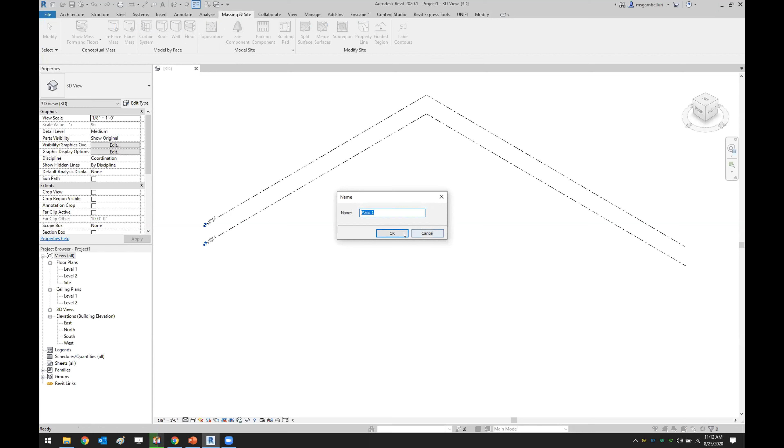There we go. Okay, can you see my Revit now? Look, all right, good. Yeah, I was going to have to explain it in words. Go to Revit, do an in-place mass, that's one way to do it. Okay, and then now I got to go up. Now I got to start all over again. Make a rectangle, I suppose it has a rectangular base. We could have an academic discussion about that in the future. Just click on it and say create form, pull this up, pull it over, and you got a rhombus. Okay, there we go, good enough? All right, easy peasy.

Okay, so let's start the formal presentation from the current slide. There we go, you can see it, right? Getting started with Revit. I figure this should be a little informal because I'm talking to a user group. I've talked on this topic probably 10 times this year already. So I'd like to figure out which way we should head on this topic because it's pretty broad. But anyway, we'll just play it out.

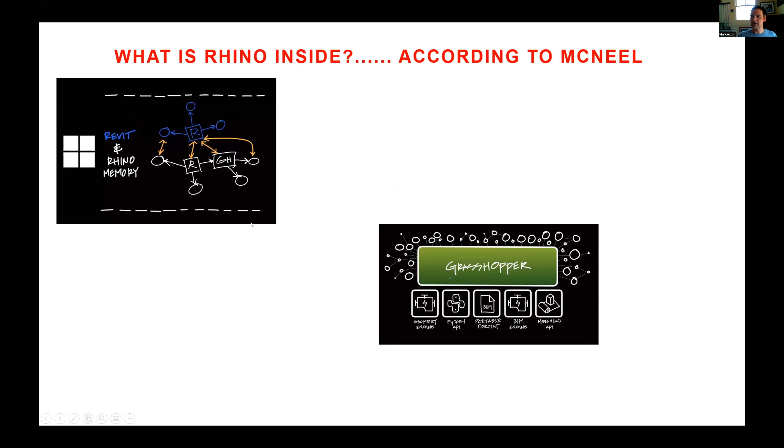They talk more about how it works in the background. Today, I'm going to talk more about the practical side of it. Okay, let's go through these really quick.

What's the issue? Please chime in if you've felt these pain points. What's the issue? We've got Rhino, right?

So typically in a design office, a lot of the design is done in Rhino, which is a 3D modeling program, or maybe SketchUp. Does anyone want to chime in and tell me if they've used Rhino in their office? Maybe some yeses, some nos, I can't see the chat, maybe some nothing.

We have a little interaction. You can do it while it's virtual. I believe that. Let me see here. Oh, there we go. Okay, I was able to, yes, okay.

Caesar says way in the past, back in the day, they used it a bit. Okay, good enough, at least you know what it is, at least you've heard of it. Familiar with Rhino, not working knowledge. You're gonna have to dissect that a bit more for me, Lee. Don't really know what you mean there, but okay. So if you're familiar with it, familiar from school, good.

Okay, so typically take a snapshot in the industry. Rhino, a 3D modeling program, is used for a lot of the design, not Revit. It doesn't have to be Rhino, sometimes it's SketchUp, I guess in some cases it might be FormIt.

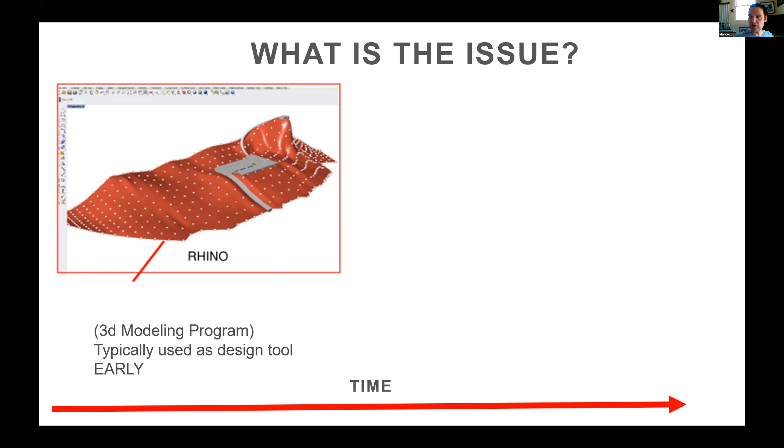So this is kind of like what typically happens in an office. Well, the problem is, so what's the problem? The problem is that you have Revit, right, which is a BIM software, a modeling tool, a documentation tool, and a 3D coordination tool. But if all the designs are happening early on in Rhino, not in Revit, well you've got to get them over there, right? So that's the problem we have.

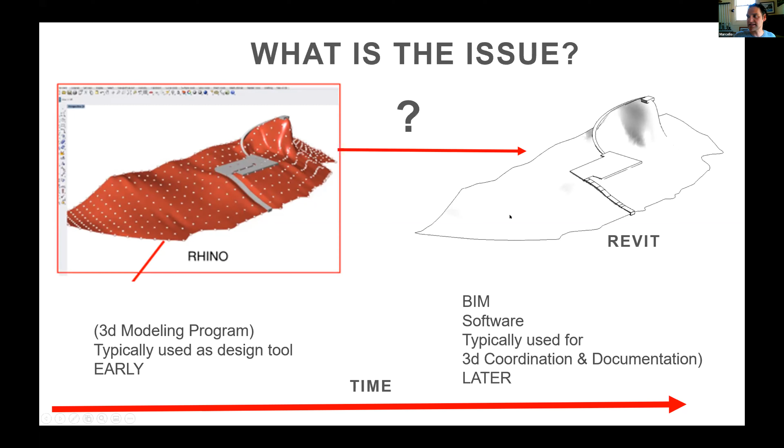And so it's a big problem in our industry. Would anyone agree? We use taking Rhino and remodeling that work in Revit. Okay, who said that? Alex. Oh good, okay, hold on to that.

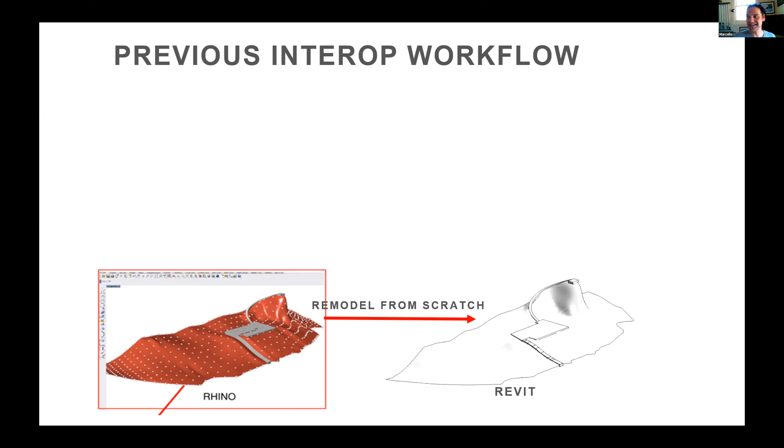Typically, Alex, this is a typical workflow to solve this problem, right? You have Rhino and you remodel the darn thing from scratch in Revit. I would say this is probably the most common use, which seems like absolute insanity in 2020. I think it is extremely common, as Alex has pointed out, and very difficult.

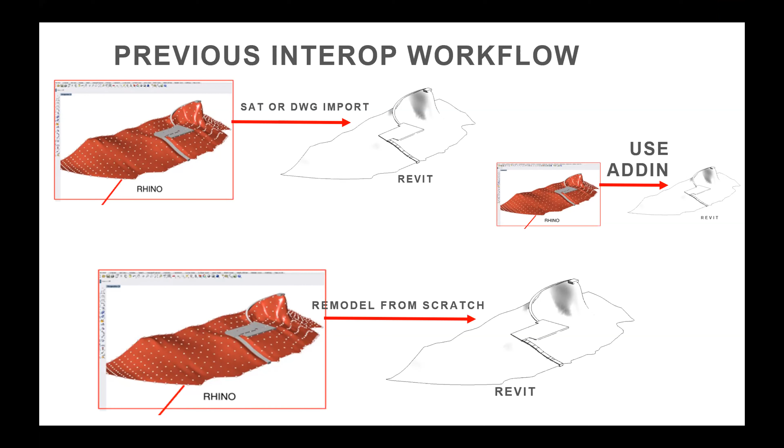My microphone's very choppy, let me adjust it because I'm moving around. Uh-oh, I know, I had this set up as a boom mic, but okay, hold on, we'll figure it out. You're sounding great now. Is that better? Yes, much better, that's way better. Okay, am I breaking up, Anthony? Not at all, sounds like a connection issue, not the mic. Is there connection, good? Oh, so that's a Rocky Mountain issue or a Southern California issue? I'm guessing a Southern California issue, must be all the wildfires. Okay, but you sound all right now, so carry on. Okay, okay, continue.

Where were we, maybe lost my train of thought. Add-ins, okay, so these are the three typical methods to deal with this, right? The problem is you need to get modeling, 3D modeling tools into Revit. Why? Because we gotta be able to coordinate and document the darn thing. Okay, pretty straightforward there.

Sadly, like you said, remodel from scratch. Why do we have to do that? Okay, anyway, the McNeel company who makes Rhino said, well, we understand the issue, so what we're going to do is take the whole thing and ship it right into Revit. Entire Rhino program, which also includes Grasshopper, we're going to shove it inside Revit, and we're going to call it...

Anyone? I'll wait for answers. Rhino and Revit. Yes, and who was that? Who was that? Huge, Brian, yes, Rhino Inside Revit. Let's call it Rhino Inside Revit. So what is Rhino Inside Revit? It's Rhino Inside Revit, that's what Rhino Inside Revit is. Is that clear to everybody? Very clever naming. I'm gonna let you, I'll let that sink in for a second, and I'll be back in 5 seconds.

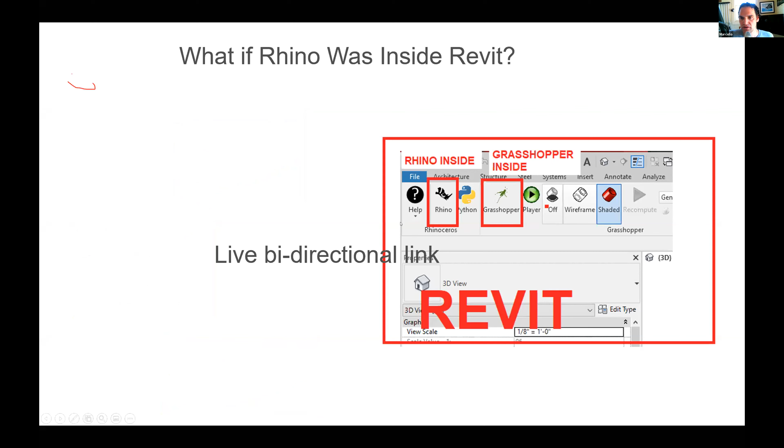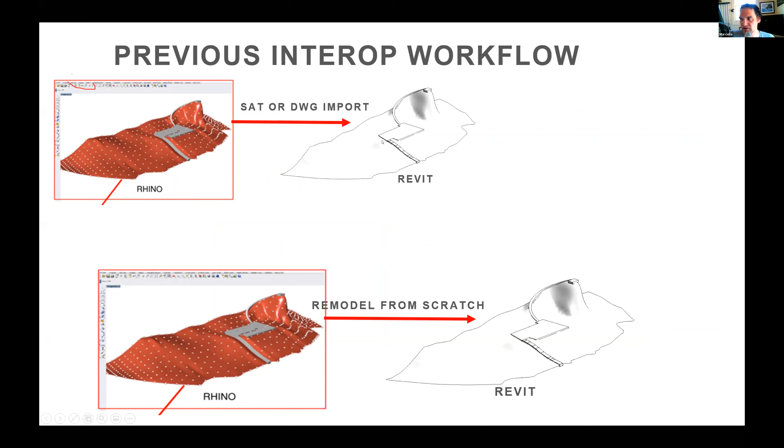That's what it means by meaningful geometry, right? Because before, we had to deal with this business - we're just an SAT or DWG import. You get unintelligent blobs, and that might work every once in a while, but if you need to coordinate and document, it's not going to cut it. All right, so everyone with me now? That's kind of the method.

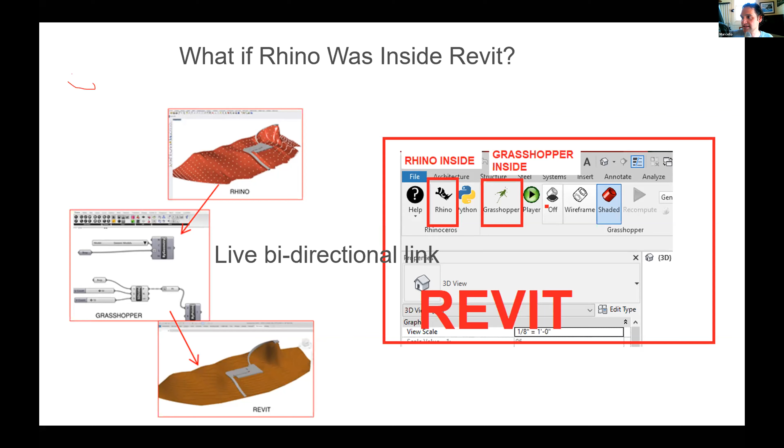We get it? I'll show you some examples. Yes, get it, okay. I could end the talk right now, but let's see some examples. Okay, let me tell you what it is not.

It is not an easy button. I'm just warning everybody with new tech, I don't know what it is, but people think it's going to solve their problems and change the oil in their car. Let me just be realistic about what it is and what it is not. It's not an easy button. You're not going to download it and hit one button, it's not going to take all your elements and convert them without any effort on your part, and it's not going to make all your documentation perfect without you checking it over. It's not going to eliminate every RFI in your project, and it's not going to eliminate every change order.

Should I go on? It's also not going to give you a bonus check, it's also not going to give you a promotion immediately. Should I go on? Everyone understand what I'm saying? Okay, so wait a sec, this doesn't give me a promotion?

No, it might eventually, but if you click this button, it's not going to solve every problem known to humankind. Sometimes when new technology comes out, the idea is that it will solve every problem known to humankind, at least in AEC. And that's not the case.

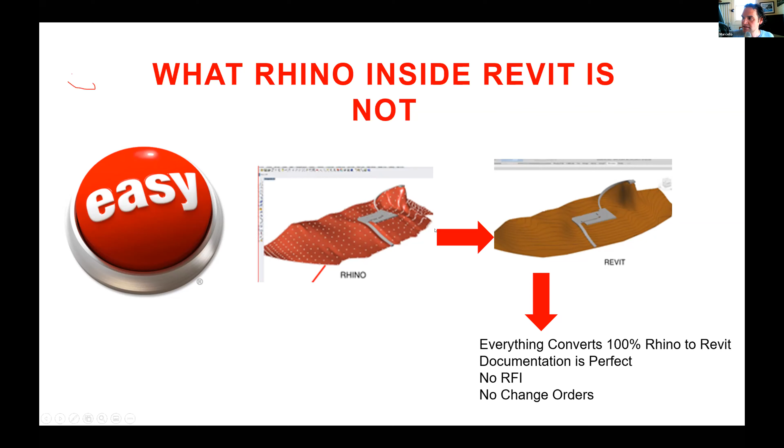Make me a sandwich. That would be awesome, see? Yeah, exactly, the 3D model sandwich. I love it.

Okay, I think about it this way. One more slide, and then we'll do the examples. Rhino.Inside.Revit's a piece of gold, but you have to shape it yourself as the user. That's all I'm saying. It won't come prepackaged where it eliminates all your RFIs, and it will not coordinate your model for you.

So how do we get started? Basically, if you own Rhinoceros, a version of Rhinoceros, you can get the add-in for free. Right now, it is technically still in beta form.

Because they're still working on it, because it is relatively new. It only really hit the public like late last year. But anyway, the McNeel people are being careful about it, so it is still in beta.

So if that bothers anybody, you can... I don't, it doesn't bother me, quite honestly. Any Dynamo users here? Dynamo, if you're a Dynamo user, you were probably using it in beta format for a long time before you used it, but that didn't hold you up, right?

Also, aren't schematic drawings beta versions of the construction drawings? Right, so in AEC, the beta concept is not new to us. If you have a problem working with beta versions, then scrap your schematic drawings and don't look at them if you're a consultant from the architect, because you have a problem with beta versions. But if you don't have a problem with beta versions, which I hope you don't, then you can explore this technology. Is that clear to everybody? Yeah? Beta versions. Crystal. Okay.

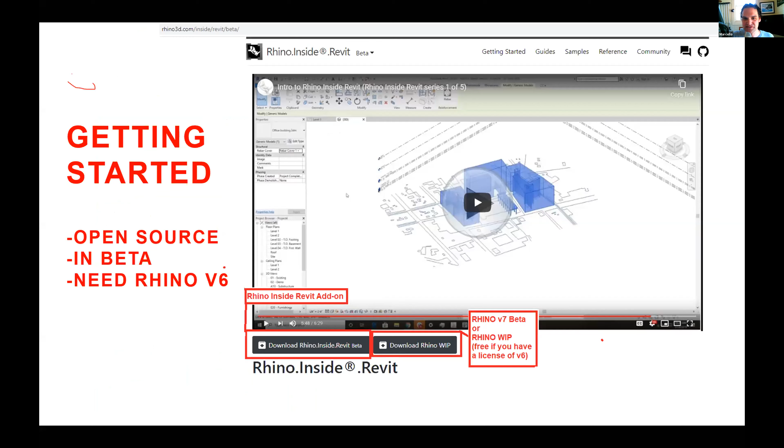Enough about that. So, beta version, you get it for free. So what you can do, there's a website. Just Google it, Rhino, have it installed, get the link. You're ready to go, basically.

Okay, so let's talk about interoperability, and then we'll do some examples. Here's why you have to do some work. If you automatically said to Rhino Inside, take my Rhino model and convert it to Revit, well, what would it do? It'd say, well, what is this red surface?

What do you want this to be in Revit, right? You want Rhino to decide that for you, or would you want to tell it, actually, I want that surface to be a topography element. For example, this is a project with a sloping ramp, some parking, a curved ramp, and a little pad up here. So then it'd be like, okay, what do you want this to be in Revit? Do you want this to be a parking pad? No, I want it to be a floor. Okay, well then, let's make it a floor, right?

And so on. Do you understand how you need to do some work? You need to basically tell Rhino what you want this to be and how you want it to manifest inside of Revit. That's the work you have to do. I mean, it's obvious to us, right? But some people don't quite get that concept, because it's like, why can't I just push a button and it all go in? Well, sure you could, but you want the McNeel people deciding what these should be.

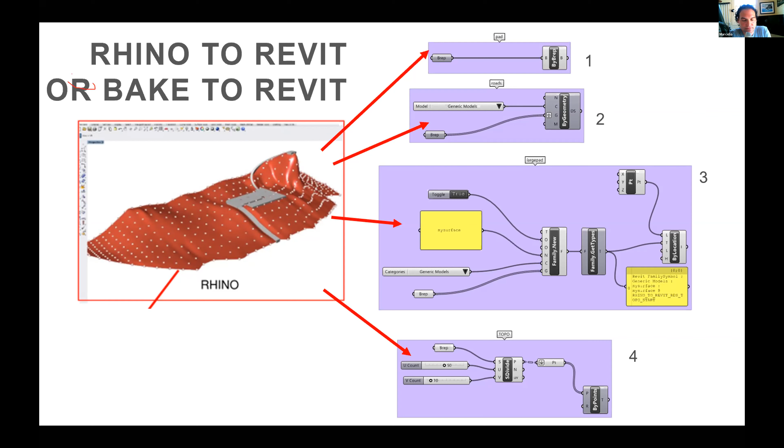Okay, so let's do some examples. Let's do some examples and we'll see where this goes.

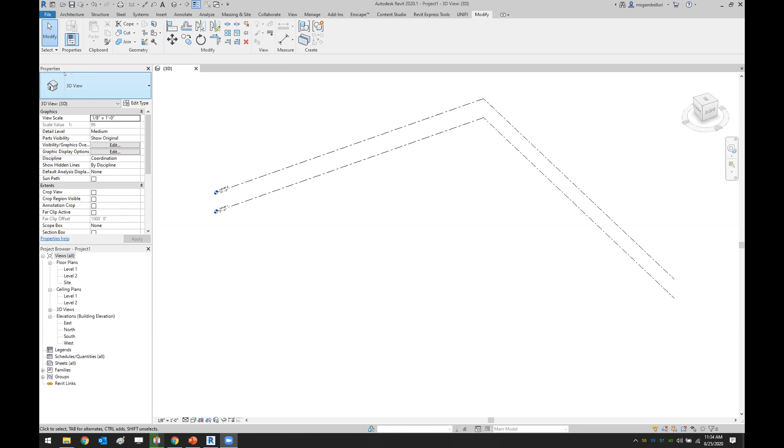Okay, what was that, Anthony? Sorry, I'm having some issues here. Got it. You're in the clear, you got the markings and you got unmuted. That was weird, I don't know where that came from. I thought it was on my monitor. First I was like, oh, but anyway.

Okay, so this is how it works. Ready? Open Revit, and then under here, under add-ins, it's going to be right here: Rhino. A Rhino WIP means work in progress.

It's just beta. Maybe we should change the schematic drawings to work in progress, maybe that would be a little easier to digest. I accidentally drew that earlier. Oh, we got some jokesters here in your user group. That's awesome.

Okay, so basically you open Revit and then you open up this little Rhino add-in, and it's going to eventually create a new tab here called Rhinoceros, and that's where all your goodies are. Here we go, see, so now it creates inside of Revit. I'm using 2020.1 hotfix, don't worry anybody, this is the hotfix. 2020.1, Rhinoceros, and then now you've got these awesome tools.

You can open up Rhino from here, Rhinoceros. You can open up Grasshopper. Okay, so let's open up Rhinoceros, and I'll just run some examples from scratch.

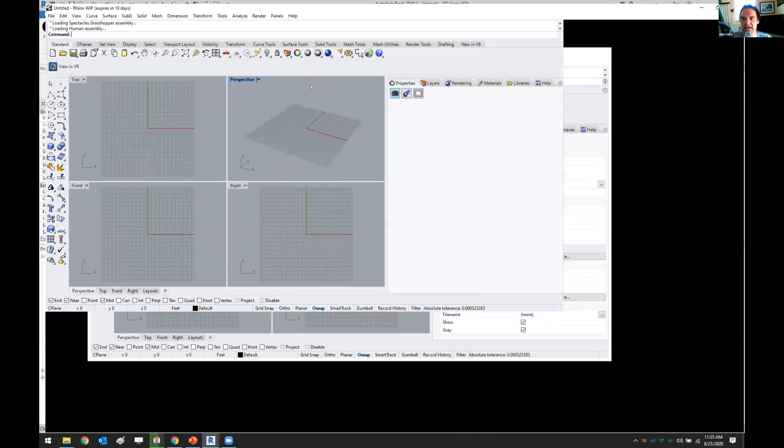What the heck, okay so I have Rhinoceros open now. This is Rhinoceros inside, right? So if you were a Rhino user, anything up to this point would have been Rhinoceros outside. So if you open Rhinoceros from within Revit, I call it Rhinoceros inside. You also know, because if you look down on my control bar at the bottom, it doesn't actually show a Rhino session open. Why? Because it's all contained within Revit.

Okay, that's clear enough. Any Grasshopper users here? Grasshopper, Sean, Alex, back in the day. Grasshopper experts, Sean and Alex, yes? Not an expert, okay.

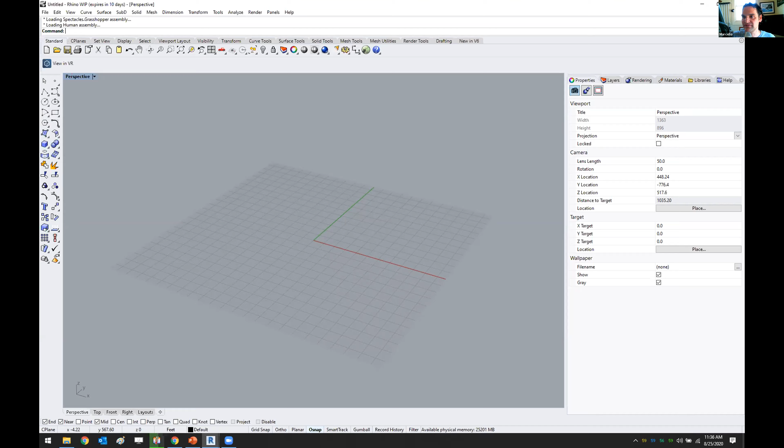Another cool thing about this technology: back a while ago, using Rhino outside, in order to get Grasshopper to work you'd have to open up Rhinoceros, then Grasshopper. Well, with this new technology, you don't even need to open up Rhino to get to Grasshopper. You can just fire up Grasshopper directly. It's a whole new concept, so let that settle in.

The reason is that now the idea is to get a Grasshopper script to a Revit user, and they won't even need to know how to use Rhino. In our office, we actually have some people who use Grasshopper who've never even opened up Rhino, because they don't need to know it. They just need to run the script.

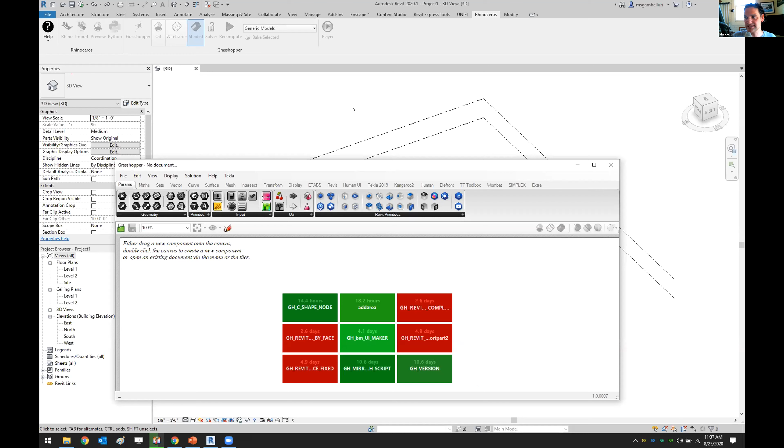One other cool thing too is there's actually a new thing on the block.

There's one more thing here called Player, actually called Grasshopper Player, similar to Dynamo Player. So you won't even have to open Grasshopper if you wanted to run a script from Revit. You just hit Player and it'll run the script. That's the idea, getting more tools to the Revit user.

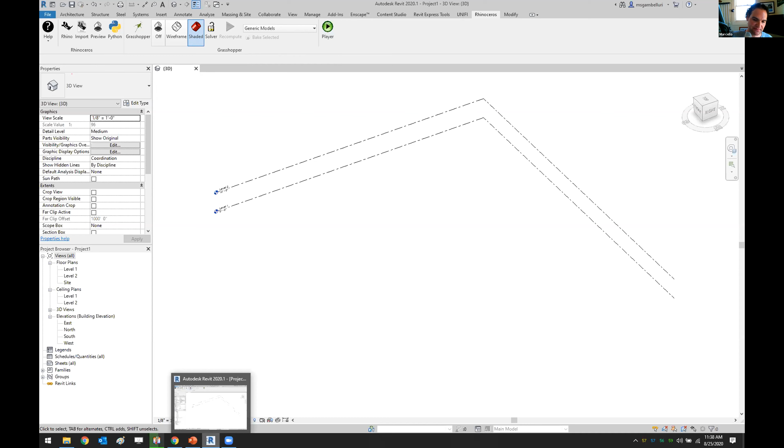Anyway, enough of that. All right, so we got Rhino. Let's go Rhino. Here we go. Okay, let's just build something.

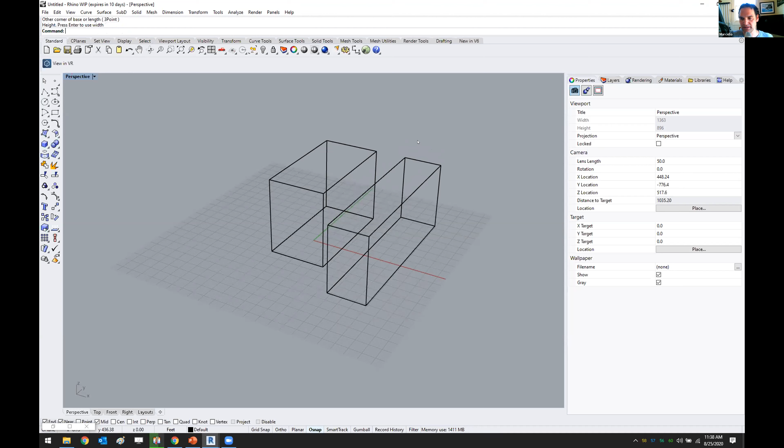Let's build a box. Okay, let's build another box. Maybe another box. Okay, two boxes. So this may be representing your Rhino model and your concept design.

How do you deal with inputs on the player if you don't open Rhino? Ho ho, Alex, very good question. I'll get to that in a minute, but very good question. You're already thinking ahead about how Player would work. That is awesome. I will answer that as I move along.

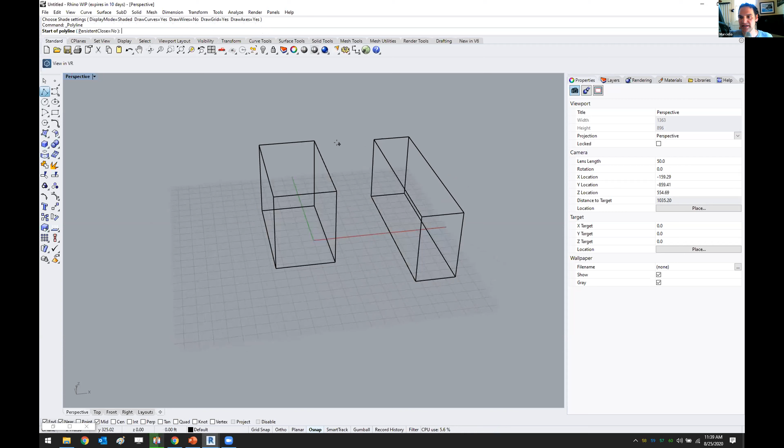Okay, so basically I have two boxes. Let's say this represents two buildings. I'm doing something kind of off the wall. And then let's say we also have some lines here, and maybe this represents structural framing of a big canopy that crosses a building. The structural engineer would probably have a problem with this, but anyway, the idea is this is just concept. So we've got buildings, some solids, some surfaces, and some lines, and they represent a concept building.

Let's say this was your design inside of Rhino. Okay, everyone likes my design? That's not off topic, Alex. Actually, nothing's off topic here. Good question, Alex. Okay, does everyone like my concept design? I'm actually a structural engineer, not an architect, so forgive me.

Beautiful, that's awesome. Okay. All right, and by the way, it meets code. I went through all the building codes, just like an architect, including all the addendums for all the city addendums. I also, for the foundation, made sure that it fits within the envelope and that it's in the right place on the site. That means I also took the soils report and read it cover to cover, just like every architect does, so that I could make a decision on where the building would need to be. Did I get that right as well? Okay, perfect, good, I thought so.

All right, so where are we at? Okay, so let's say this is our concept design, and then you want to get this inside of Revit. Well, what do you want to do? Do you want these to be buildings inside of Revit? That doesn't really make a lot of sense. Do you want this building to be a mass in Revit? How useful would that be?

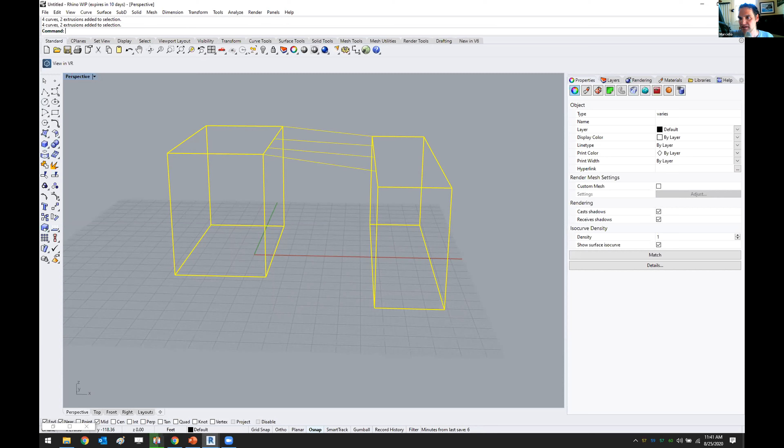So let's take this building. We'll call it building A, and then we'll turn these into structural beams. Okay, so how do we do that?

We need to open up Grasshopper, because Grasshopper is the conduit to pass information back and forth. And how are we doing on time? I can get this done in 19 minutes. I can get it done.

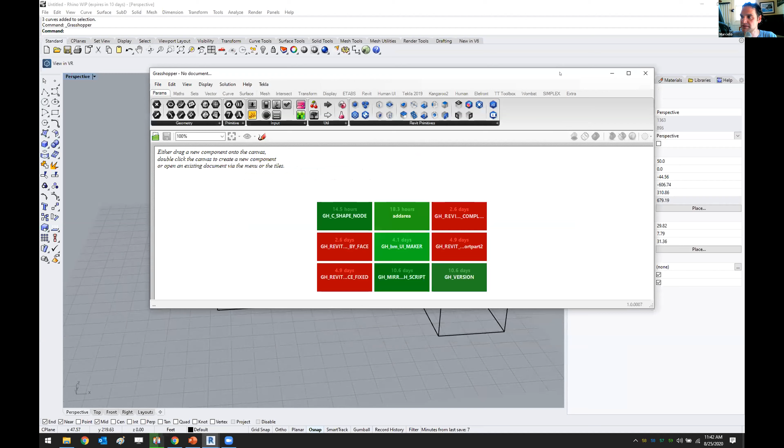The first thing we need to do is take this bottom surface, get its perimeter, and put walls on it. Okay, so let's do that. I'm going to move kind of quick here so we get it done.

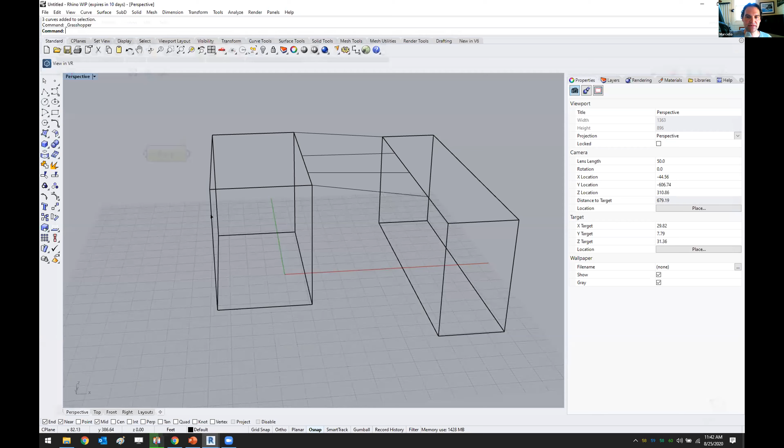The first thing we need to do technically is this is still Rhino geometry. In order to use Grasshopper, it has to be in Grasshopper geometry because they are technically two different things. So in order to do that, I'm going to select geometry, probably BREP. This will select the actual object itself and turn it into Grasshopper geometry, the whole thing. If you're not familiar with these concepts, I don't have time to go over the basics, but it's not too bad. You can Google it, there's a lot of information on how this works.

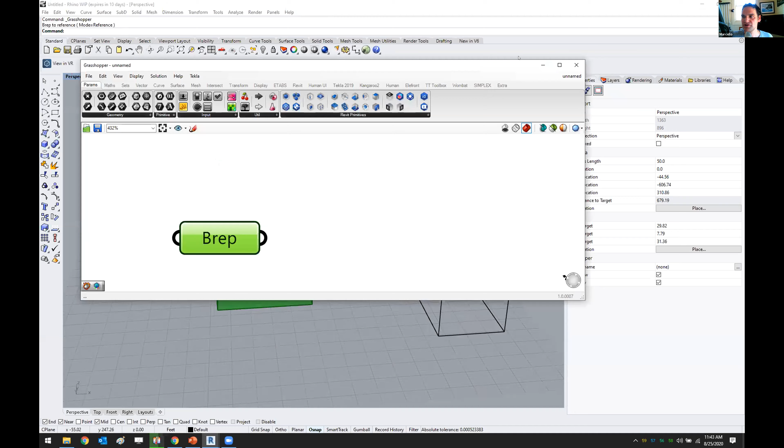Now we only really want the bottom surface, right? So there's a few things we can do. I'm just thinking on my toes here. We could go to surface and deconstruct the Brep. So I'm going to run through some things here and deconstruct the Brep.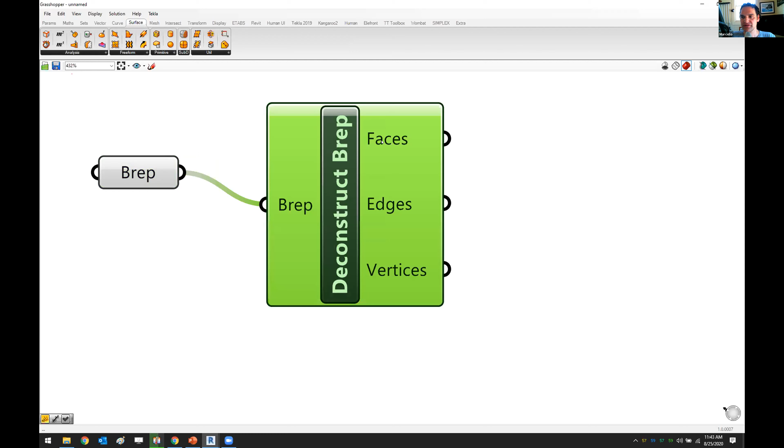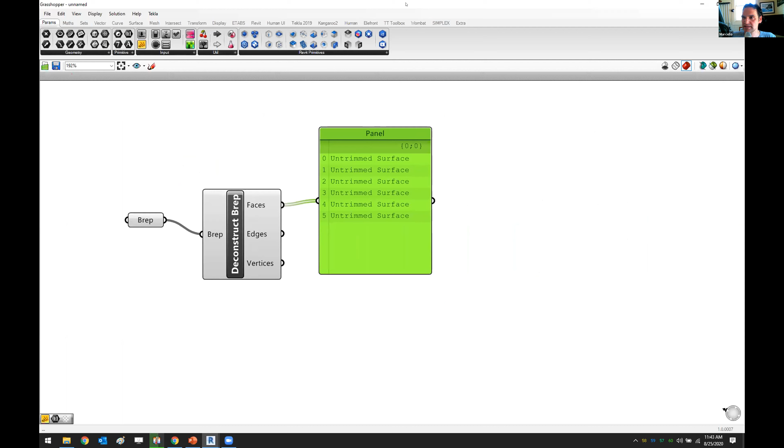Now it breaks it out into faces. If you want to see something, it's kind of like a watch node - you put down this parameter and we can see all the faces. So here's all the faces, and we want the bottom face. There are add-ins to do that - I think Wombat does that if you're a Grasshopper user. Anyway, we want the bottom surface.

A really cool trick here is I can hide this. There's a brand new node on the block called Value Set Picker. Basically, if you feed in a list, you can select out of there the particular one that you want. It's like a super watch node.

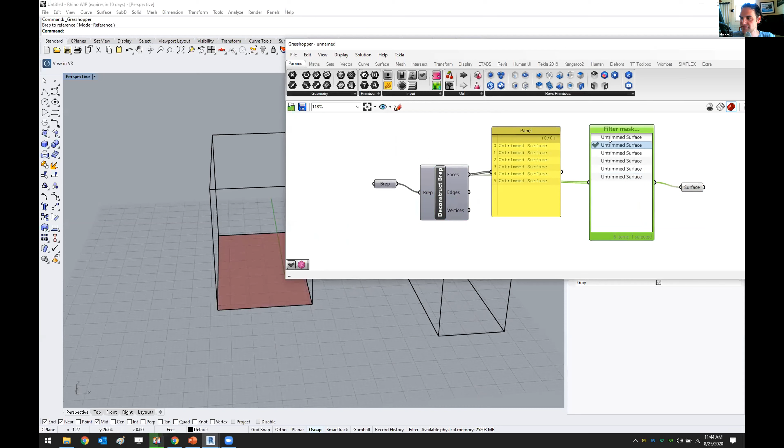So you see what I'm doing here? If I put a surface down here, I think it would work like this. Then I can walk through here and figure out which one I have. Oh, there, see, there's the bottom one. It's that one right there.

Okay, so now I have the surface that I want. So then all I need to do now is get the perimeter curves off that surface. Let's see how we would do that - there should be ones where I can get the edge curves.

Everyone still with me? Did I lose anybody? Well, that's helpful - Sean, Sean's the Grasshopper user. Yeah, you didn't think you'd learn anything new about Grasshopper, huh? Unless you came here. Okay, cool, I'm just teasing you, Sean. Yeah, that's a brand new feature, hot off the press. Cool, I'm glad you said it was useful. Are you recording this, Anthony? We're going to have to make sure we quote Sean on that. We'll quote Sean on that.

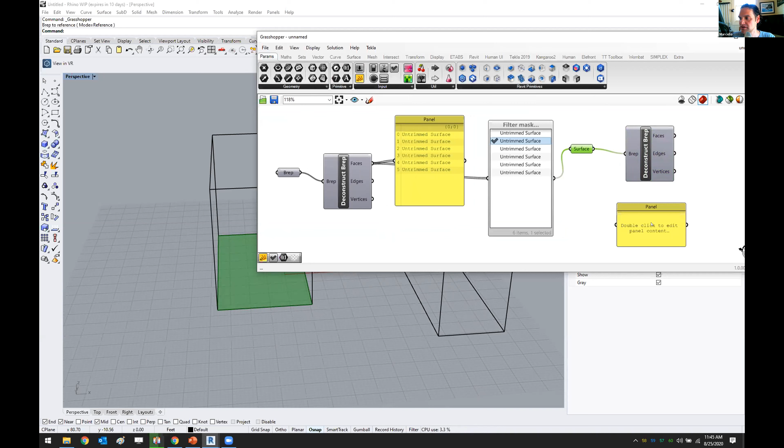Okay, so we can get the edges. I guess what I'll do is use this thing all over again, and get the edges. So I'm going to use a new BREP, which is this one, and now I can get the edges, which are this one, and that's good enough. Now we have the edges of the bottom surface, which come out of this particular output port.

So we got those. Let me turn this back on - preview on. Okay, cool, we're good there. Now this is where all the magic happens. Anyway, whatever I'm doing, I got the edges to that bottom surface.

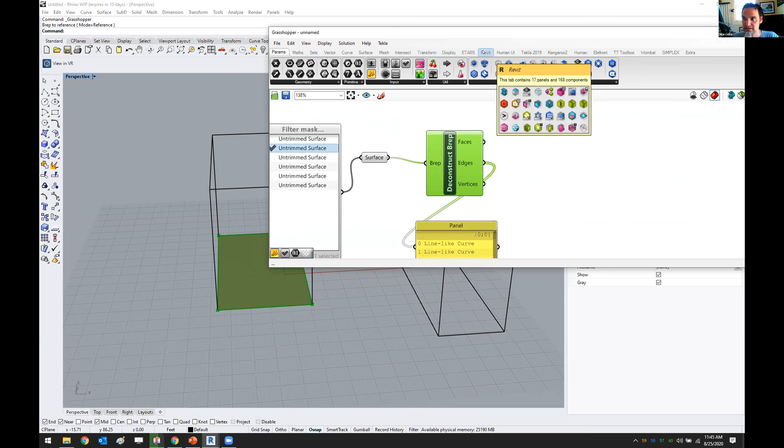So under Grasshopper, there's a tab called Revit. Under Revit, I can go to Build - actually under here, under Wall, Add Wall, right there. This node actually creates a wall in Revit using Grasshopper. So this is now called Rhino.Inside.Revit. Well, I call it that, but it's Grasshopper for Revit.

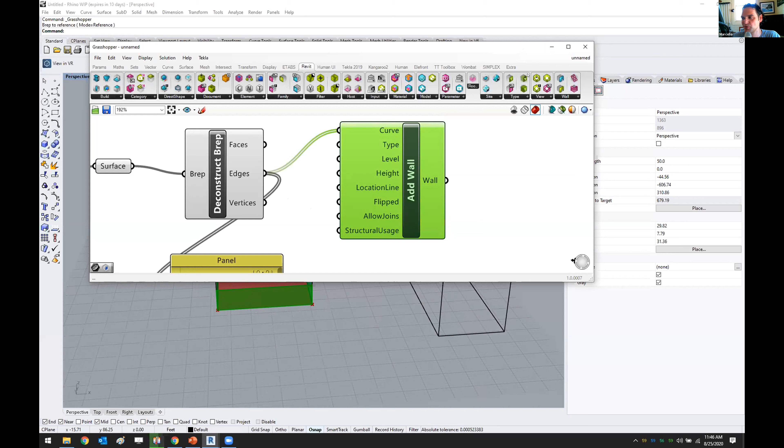Everyone's still with me, sort of? All right, I'm just going to feed the curves into this input port. And it's already going to set some defaults like type, level, height. You can change all that, but for now I'm just going to leave it all as defaults. If you want to change the type, you can come here and change the type.

You could change the height. Probably the best thing to do would be to get the height of this cube and then assign that to the height. I'm not going to do that, okay everybody, just so we can keep moving along.

All right, so now if you look here, I'm going to put another parameter, or what Anthony called the super watch node. And it looks like it actually built some things in Revit, so let's go take a look.

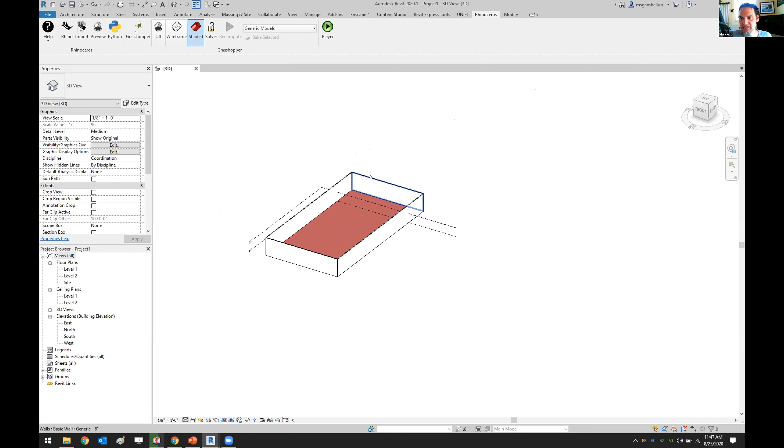I'm going to minimize Grasshopper, minimize Rhino.Inside, and we're going to take a look. Oh, look at that, so now it built the walls inside of Revit. Now they're not quite the right height, but I already explained how you can make the height, so I'm not going to bother with that.

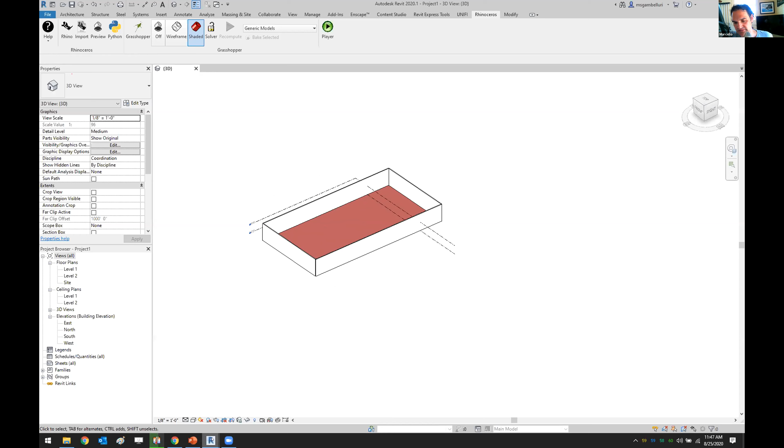Anything from anybody? You like it? You don't like it? Not a big deal? Maybe it's not a big deal. You got to kind of do it for yourself, and then you'll feel that there's quite a bit here.

Okay, so the idea here is if I change this and make a change, say the shape changed or the building got bigger or whatever, since all that geometry is getting passed through Grasshopper, and Grasshopper's building the wall, then it would automatically make the change inside of Revit. So the Revit would change.

Is it live? It is. It is liver than live, Rod. It is liver than live.

So if I make the change, I guess we could try it. I can drag this over here and let's see if it makes the change. Now my beams are floating out in space. Structural engineer is going to kill us, but anyway,

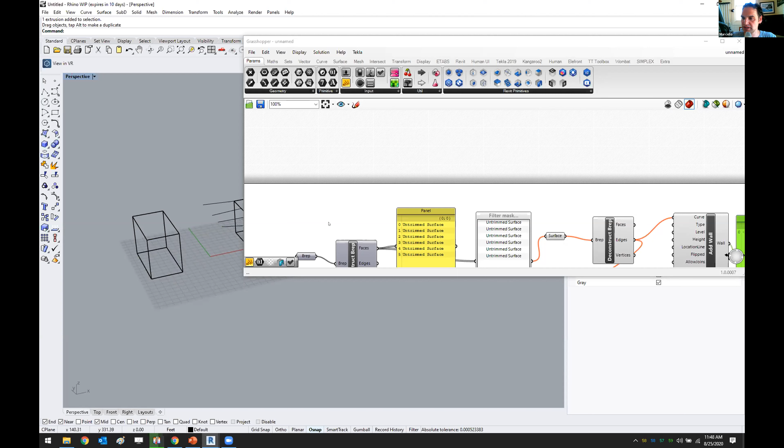it would make the change. I guess it unselected my... why did it unselect my surface? I don't know why. Oh, I guess that's not the right surface. There it is. Okay, did you see that change?

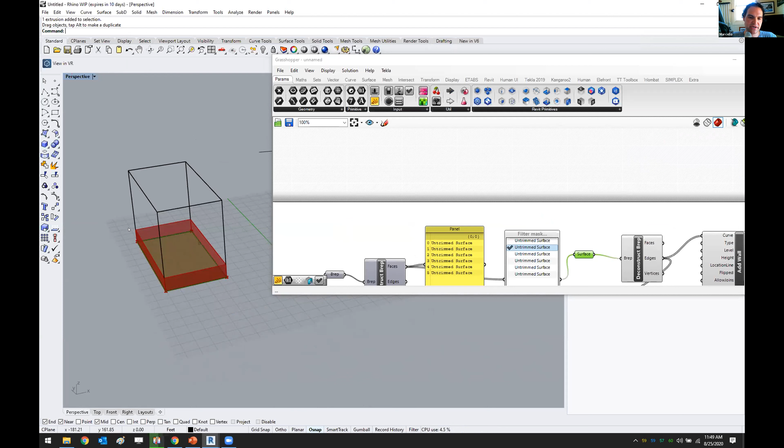Boom, yeah. In fact, it actually previews the geometry inside of Rhino as well. Yeah, so they made the change. It's a little harder to see in Revit because you don't really have a good reference, but it did move, if you kind of remembered where it was before, right?

Here's Revit, there's Revit, right? You saw that it moved. So it is totally live, 100%. That's the whole point.

Okay, so we said that it's making, I guess I didn't really explain it, but it's basically making a bi-directional link, okay, it's not just a one-time thing, right? What would be the point of that? I don't see any point of that because it would be meaningless, and we want things to be meaningful, right?

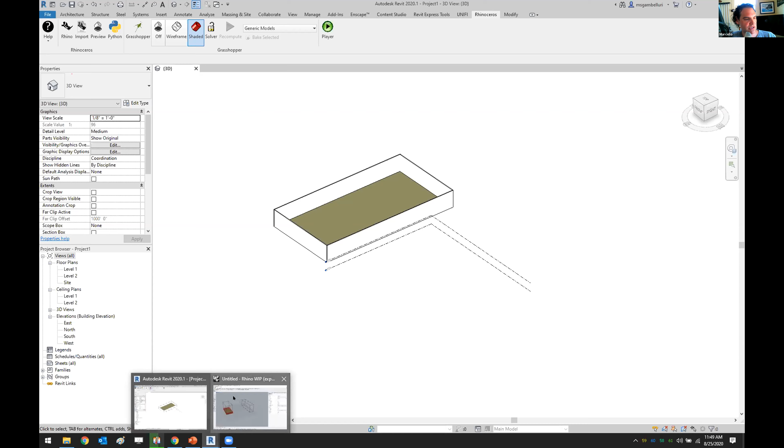So good question there. All right, so we're with time. Got 10 minutes, perfect. You want to do the beams, or do you want to see anything more with walls? Skyhooks. Is it live? Excellent. Beams, let's see the beams.

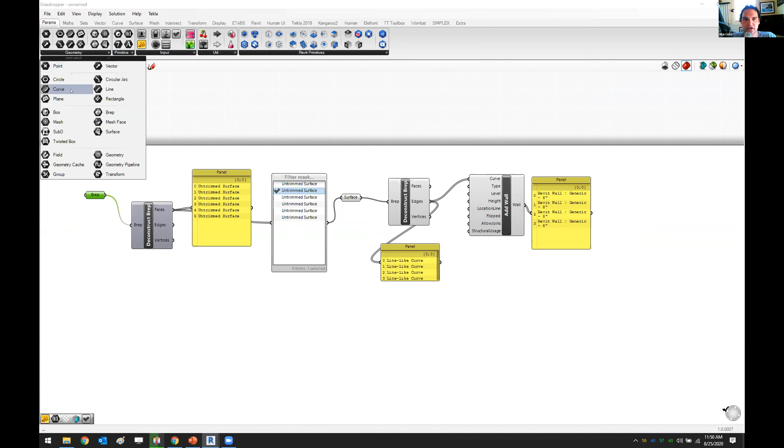Okay, beams, all right, so same kind of thing. Instead of getting the Brep, which is basically a surface or a solid in Grasshopper talk, not in Rhino talk, in Grasshopper talk, then we're going to go here and say curve. So we're going to select the curve out of Rhino, out of Rhinoceros. Why? Because we got to get into Grasshopper geometry. Why? Because we need to use this, which is

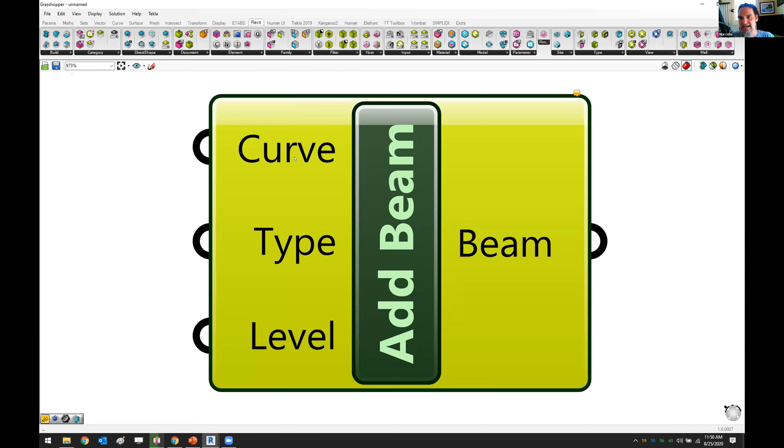our beam creation node in Grasshopper that makes a beam in Revit, and it's asking for a curve. So we can't take these curves and shove them into the input port, right? We've got to first convert it to Grasshopper geometry. So how do we do that?

What's really nice, I think, about Grasshopper is you can actually select them first, go right here and say set multiple curves, and then it'll automatically set it.

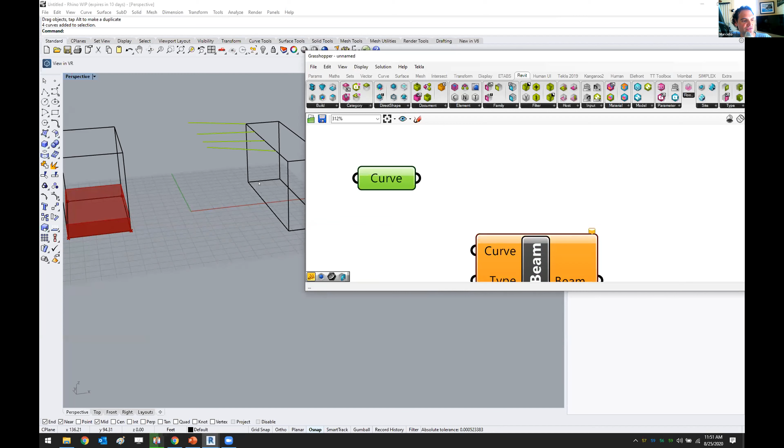Can you place wall by surface in case you have non-curvature surfaces you wanted to turn into a wall? Yes, you could, Sean. I'll explain that. I'll answer that question after I do this. Yeah, yes you could, I'll answer that next.

Okay, so here's the curves, right? Let's just feed them in, boom. It should build them. It probably gave it a default type.

We'll just stick with default, and level 0 probably as default level. But okay, anyway, there you go. Let's look at them, let's see. Here they are. They make me laugh because what did it use?

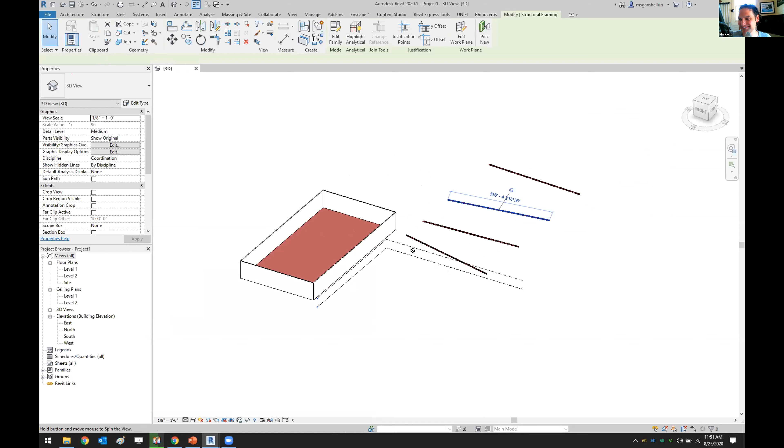Oh, it uses, well these are really long, these are 100 feet long. There's no way a 12 by 26 is going to work. No way. But anyway, you get the idea. So there's the beams.

Us architects think it will. Oh, yeah.

For you architects, if you want a rule of thumb, a 12-inch beam is going to probably span 24 feet maximum, and that's if it's composite with concrete and studs on it. Definitely wouldn't work here.

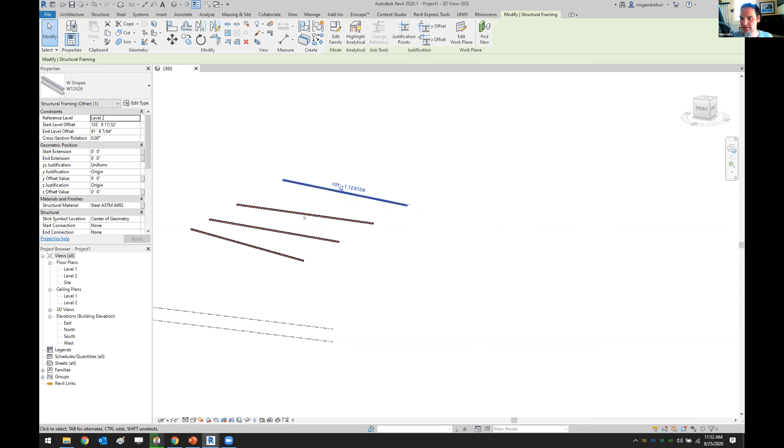100 feet? Oh man, you need probably a custom section. Yeah, you'd need a custom section. But anyway, okay, so there we go. There's the beams, and those are also parametric.

All right, now I want you to notice here, cool stuff. Hopefully cool stuff. Ron, yes, it is parametric and it is live. So if those curves moved, then these beams would move.

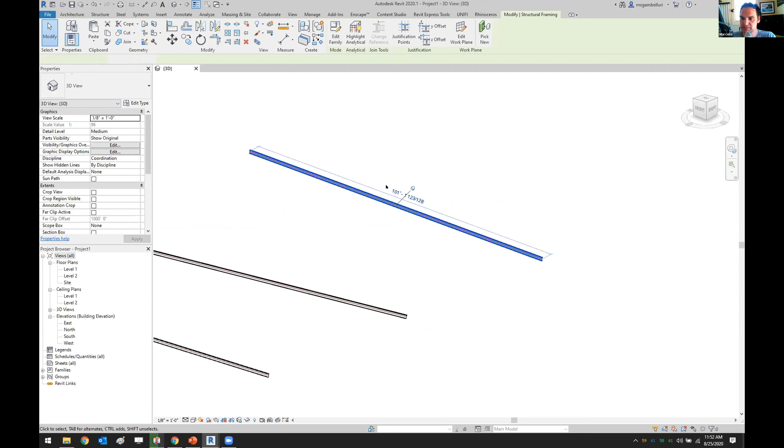All right, so here we go. Let's look at this really quick. I want to explain this concept. Do you see how there is a pin here? I'll show a direct shape import, yes. Do you see this pin here?

If you unpin this, that severs the link between Revit and Rhino. Is that clear to everyone? The unpin severs the link.

So now I can move it because the link is severed.

So if you redo that, will it create another beam? No, it will not create another beam. Oh, in this case, yes, because I severed the link.

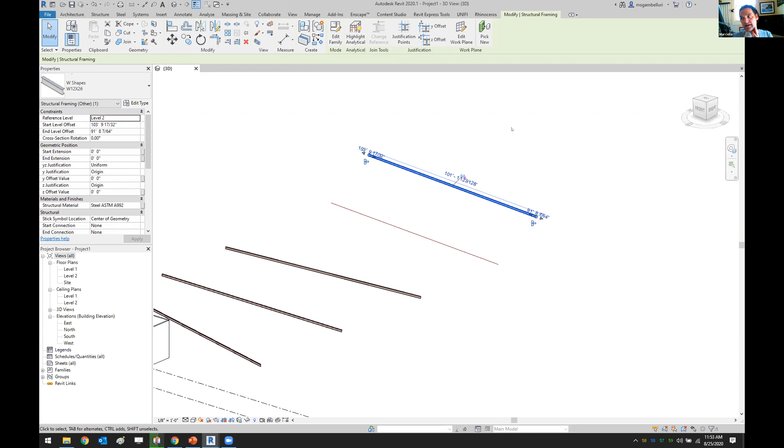Yeah, so the idea is, I mean, it is similar to Dynamo, except in Dynamo, if you took this and slid it away, it would just slide right back. What I'm trying to say is, you need to think about this from a workflow standpoint, right? And talk to your Revit users if you're the Rhino user, right? And you need to communicate with each other.

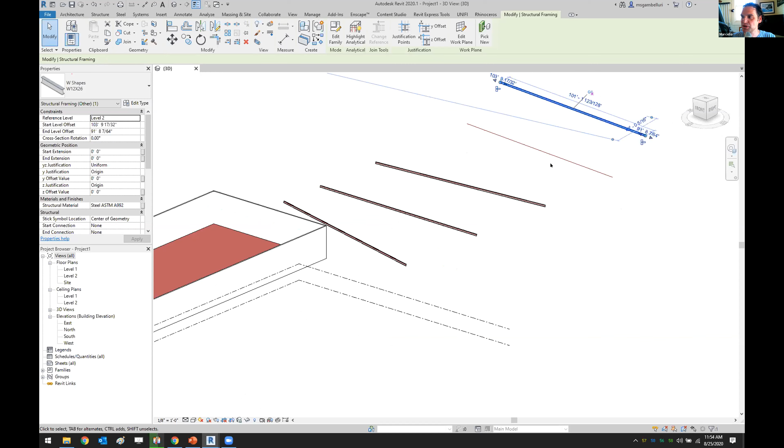Because in Dynamo, if you delete a beam and then it pops back in place, it's going to give it a different ID number. And that's the same thing happening here. If you unpin it, you sever the link, because there's no way to sever a link in Dynamo because of element binding.

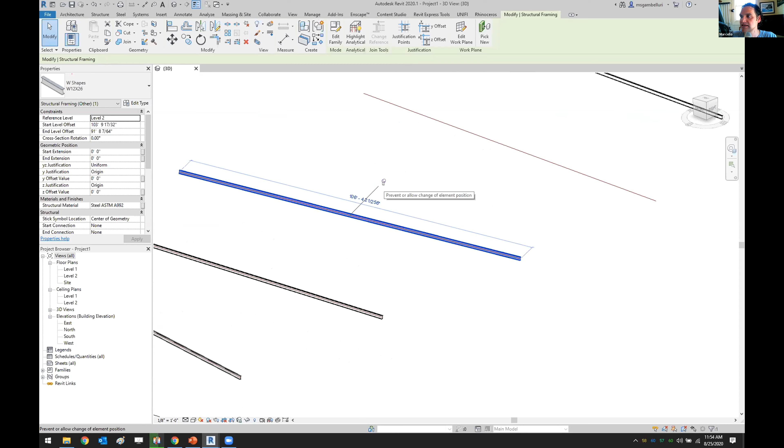What if you repin? No. If you repin, no. If you repin, no. Repin, no. No. Once you unpin, you severed it.

So you're like, well, what if my users unpin? Or what if you tell your users not to unpin? You can look at it that way. How will they know you're using Rhino and they're using Revit? Well, you call them on the phone, or you email them, or you text them, or you team chat them, because you need to have communication with whoever's using these databases. Is that clear?

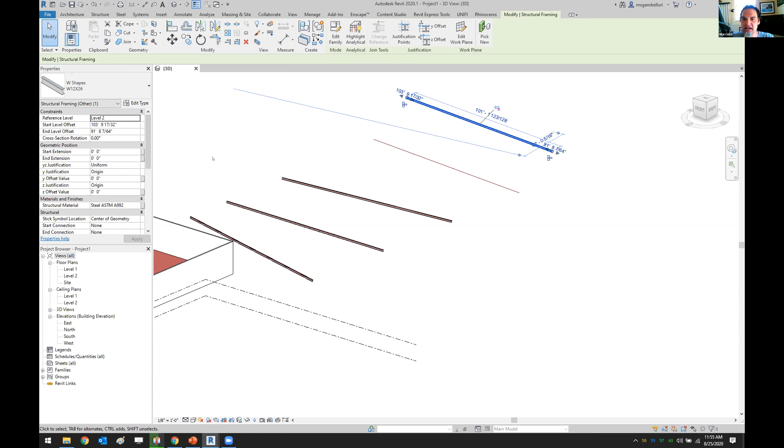Yes, okay, clear. Okay, so another question came in. How do you, and we'll do it with the other building. So these are like making native Revit elements, but maybe you don't need to do that. Maybe you're just kind of doing studies and you want to bring it in as a direct shape. You could do that, so let me just show you that example really quick.

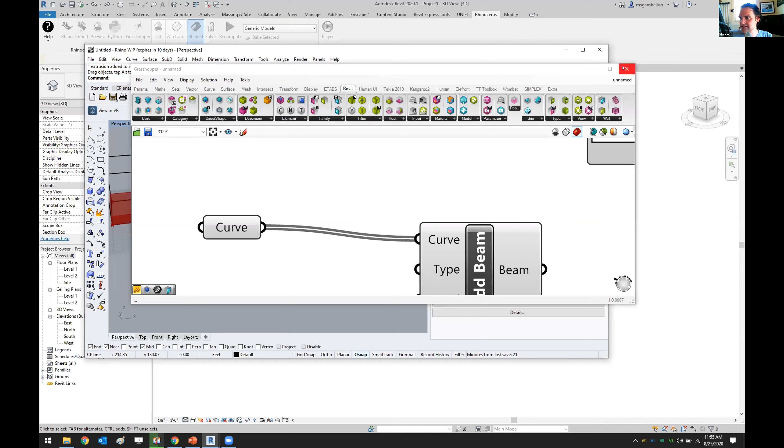I don't remember who asked me that. Was that you, Alex? So basically the idea here is, okay, maybe let's bring in this building as a direct shape. So the way it would work is you would basically select it out, so I'm going to say select BREP.

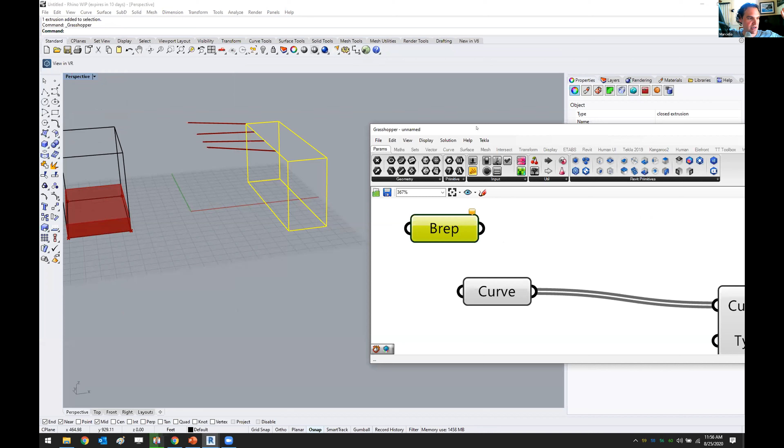Now you don't have to select this way. You could actually say take everything on this layer, turn it into structural beams. You could do that if you wanted to. So maybe these curves are on one layer, and you're not selecting this way, you're selecting all layers on structural beam S layer or something. Okay, so anyway, I'm going to do this.

So I'm going to select this, I'm going to set my BREP here to this. Now there's other creation methods here. If you look into the Revit tab, there's direct shape. Now there's direct shape, add BREP direct shape.

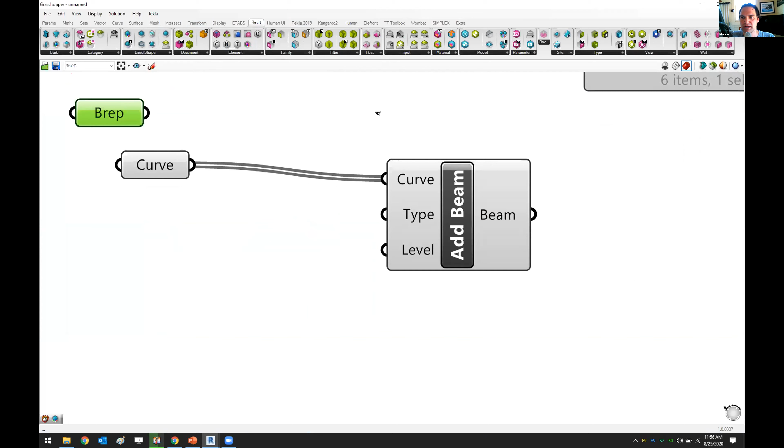If you use this, it will just send it in as a direct shape and put everything on default, then give it a generic category. So that's kind of one way to do it.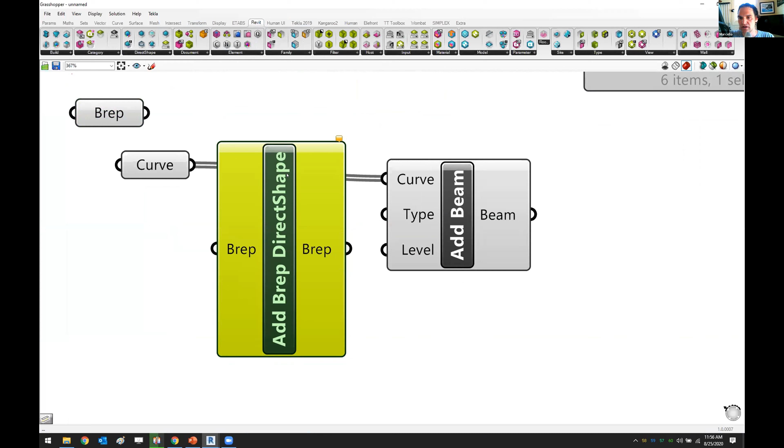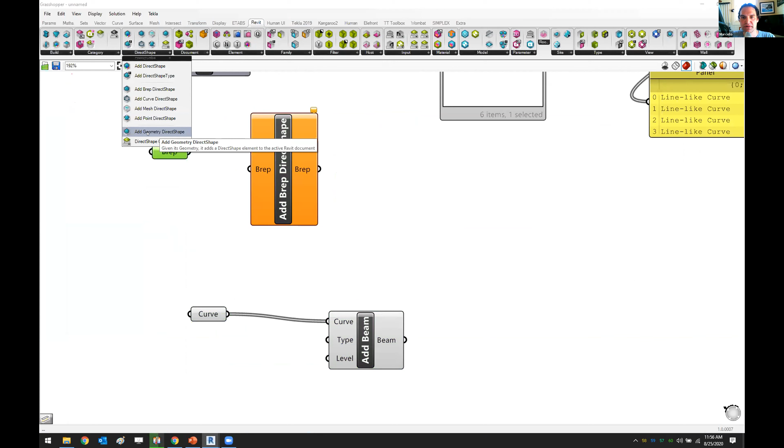If you want it to be a little more sophisticated, you could do direct shape, add geometry by direct shape. This gives you more control because now you're able to add a name and a category. Maybe you want to use that road category that's never been used, or make it whatever. Then you basically feed in the geometry here, and you even have the ability to add material, which is cool.

Then basically this direct shape would show up in Revit this way. Here it is - that's your direct shape, that's your building as a direct shape in Revit. So maybe if this had a material on it and you're doing renderings in Enscape, maybe it makes sense to do it this way.

I'm not here to tell you that. That's a decision you make as a user, and you talk with your Revit user and your Rhino user if it's not you, if they're not the same person. But the point is that for every entity, you need to decide what it should be, how it should look, and how it's going to move in the future.

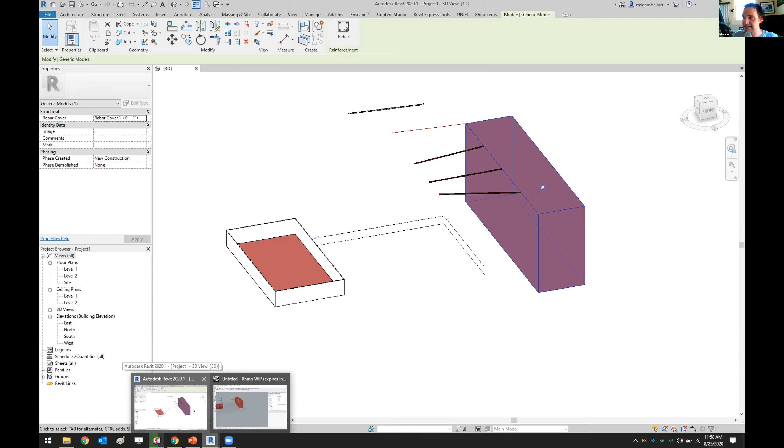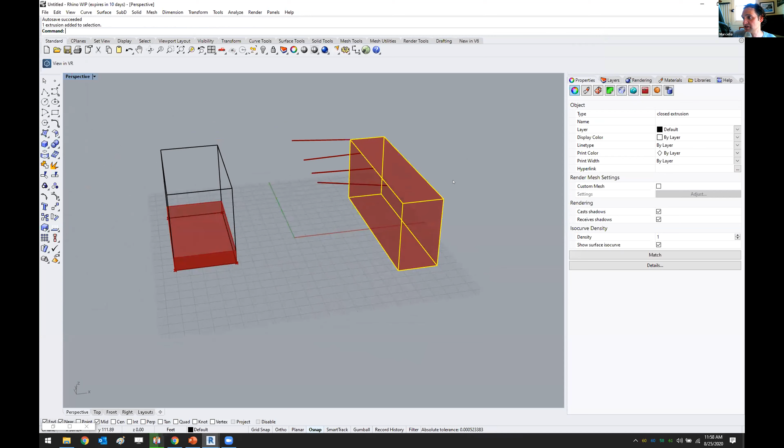In Rhino, this is so important because you need to plan this out way in advance. For example, maybe this building may not be here - maybe it'll eventually go into phase 2 or something. Maybe you don't need to work out all the intricacies because you know when you're doing documentation you'll ignore it eventually. So maybe it can just be a direct shape.

How are your Revit users going to use this information when they start to document, that sort of thing? So all these decisions need to be made.

Do you plan to bring this in a few times, and then at design development, when the design settles down and there's no more designing, all the pencils are down - that's what design development means, right? It means pencils down. The architects put their pencils down and don't do any more designing. At the end of design development it's only detailing and documentation. Is that correct? That's the way I understand the AIA definition of end of design development.

Okay, so maybe you go to design development, and then in Rhino you sever the link and never use Rhino again because you know there'll be no changes ever. Maybe you do that. So these are decisions you have to make along the way - it's very personal and workflow oriented.

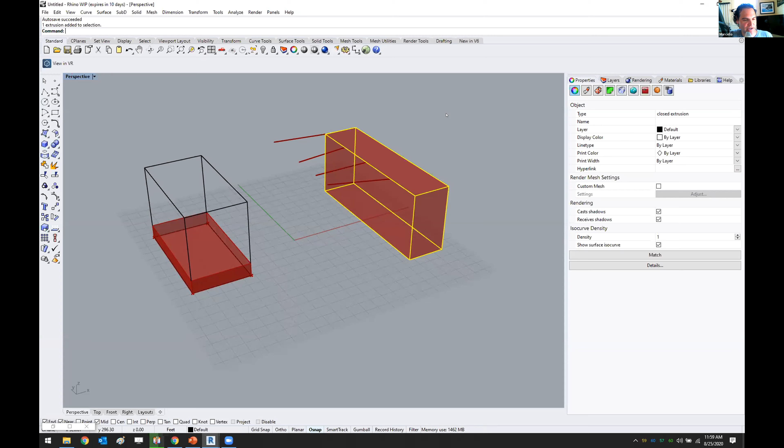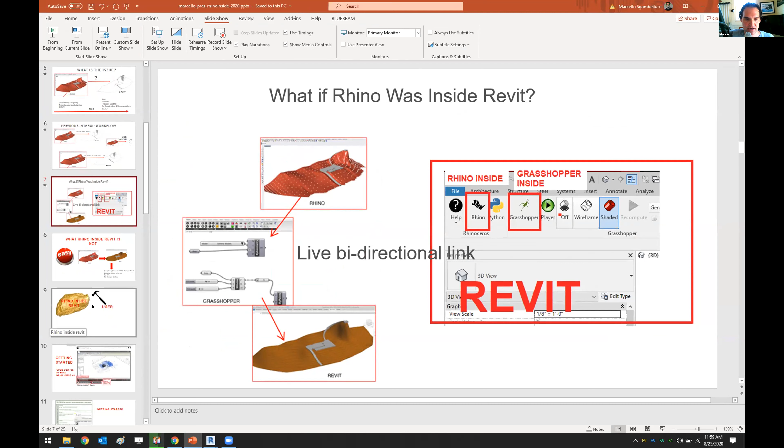Let me see if I have any other comments before we call it quits. Is everyone having a good time? Am I clearing this up for everybody, at least what it is and its potential? Okay, cool. I want to give you the full story here, I don't want to just tell you.

Let me point out a few more things that make this technology so awesome. It doesn't just have to be about interoperability, because Grasshopper is now for Revit. It will not replace Dynamo, because Dynamo is still integrally tied in with documentation and creating stuff in Revit.

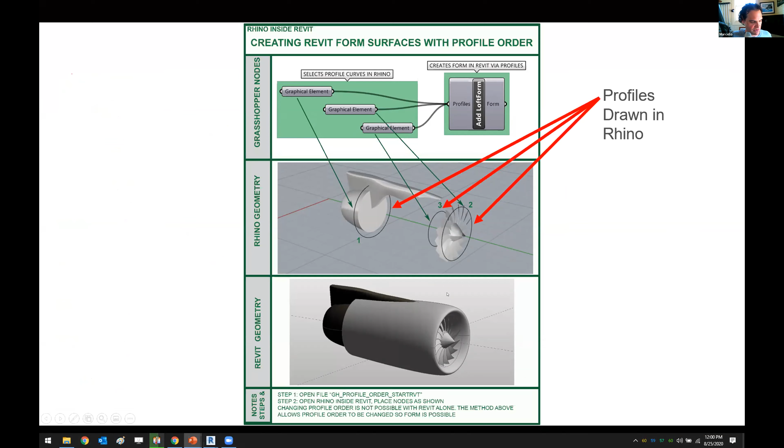But there are some nodes that could help you do stuff like, say, selecting profiles out of Rhino and building them in Revit - there are nodes to do that. There's also nodes to manipulate annotation, like if you wanted to take all your annotation, maybe in this case room names, and change them all to uppercase.

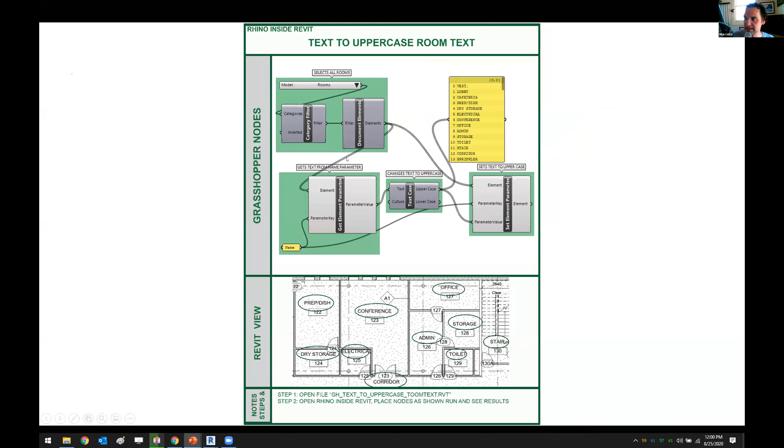So then it brings up the question: since there's geometry you can model in Rhino that you can't in Revit, how does this work with Rhino Inside if you were to attempt to bring that geometry into Revit?

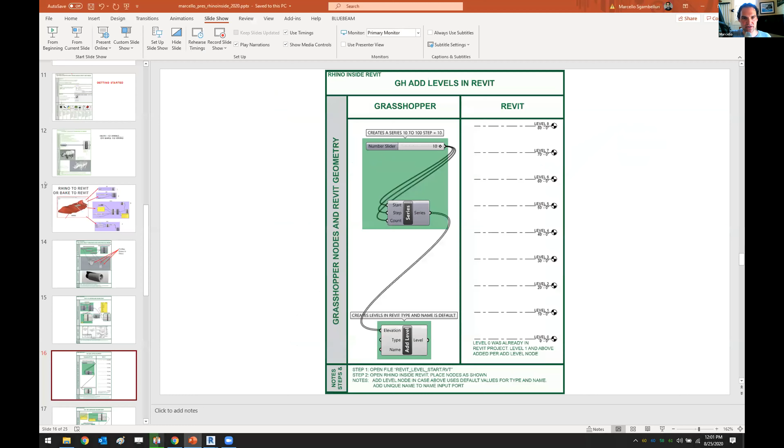Very good question, Alex. Let me first say this - that's a very good question, but let me just say this. I know you kind of saw this image, right?

Maybe I'll flip that question on its head. Since there's geometry you can model in Rhino that you can't in Revit, maybe there's geometry you feel more comfortable modeling in Rhino than Revit. Over the last 11 years, I've created a lot of crazy shapes inside of Revit. So far, I haven't found anything you can't model inside of Revit.

Case in point, this is a Southern White Rhino built inside of Revit that I brought into Rhino. I call him Billy, because when I start saying Rhino Revit, Revit Rhino, it gets confusing. So this is Billy. I built Billy inside of Revit. I showed the McNeel people, they loved it. And this is how it looks when you bring it inside of Rhino.

One thing I didn't explain is you can go from Revit to Rhino, and you can go Rhino to Revit. So I didn't really talk about going Revit to Rhino. There are some times when you'd want to do that. But hey, you got to check out Marcello's model.

Anyway, I'm saying, Alex and everyone else, if you have someone in your office who's more comfortable modeling inside of Rhino, let them model inside of Rhino, and then you can bring that geometry inside of Revit. Now, since you're bringing it inside of Revit, you have to be conscious about how Revit works.

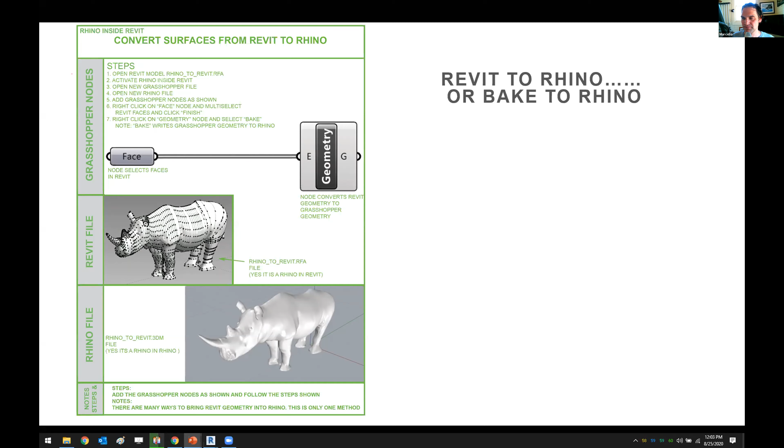Revit was never meant to model doorknobs, for example. So things down at that micro level, if you're modeling doorknobs and keyholes inside of Rhino and it doesn't translate into Revit, that's not a limitation of the link, that's a limitation of Revit. So you got to be conscious of that. But other than that, things seem to translate pretty well, Alex. That is a very good question. I don't want to get into the weeds too much, but it's a good point.

One more thing I want to mention is, if you can do something in Grasshopper for Revit that you can also do in Dynamo for Revit, why use Grasshopper for Revit? Like in this case, Dynamo can do this too. Dynamo can create Revit levels using number input. And this is what Grasshopper's doing too.

The advantage here is maybe the input of the elevation isn't coming from something you manually create. Maybe it's coming from a top and bottom surface elevation that you pulled out of Rhinoceros. So as you think about it, that would make sense. Okay, cool, Alex, I'm glad we're on board.

So, a different point here. It's good to look into other options that Grasshopper for Revit can give you, not just interoperability, because as you learn these tools, especially if you're coming from Dynamo, it can really help.

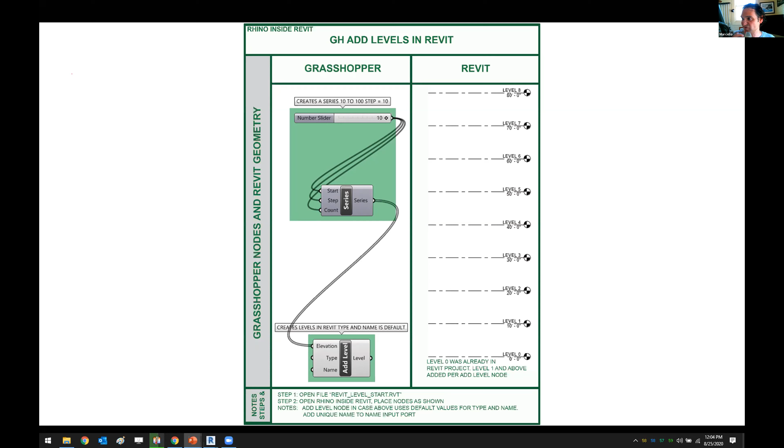One more thing, I am actually in the process of producing a book right now. I'm running pages side by side. It's already 250 pages. I basically have Dynamo on the right, Grasshopper on the left. That's how I'm doing it.

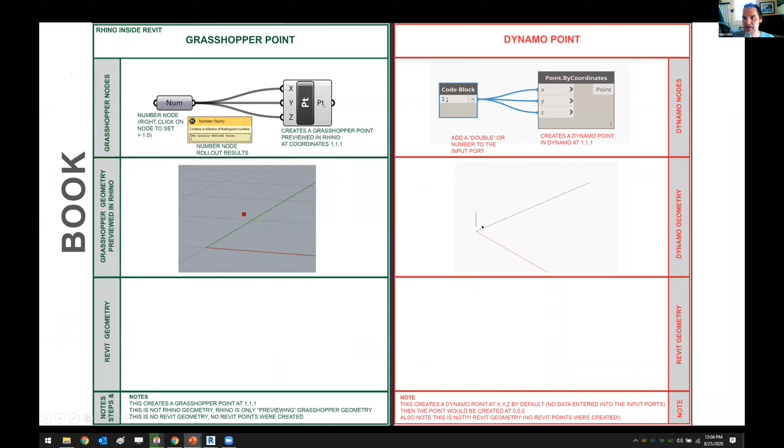So how do you build a Dynamo point? How do you do a Grasshopper point? All the way to like this one, right? How do you build a Revit level in Revit using Dynamo on the right? How do you do it using Grasshopper? How do you also get and set parameters using Dynamo? How do you get and set parameters using Grasshopper?

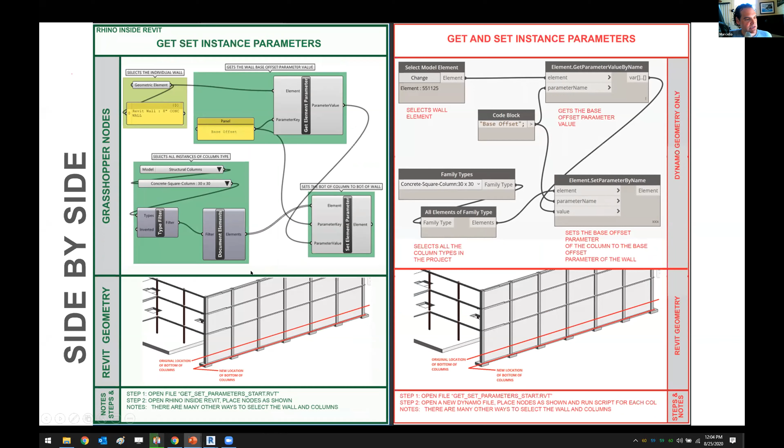So this is kind of on its way. Take a look, and don't forget this image as you look at this technology, or really anything else, I suppose. There's no easy button. It's a piece of gold. Shape it yourself, and you will have awesomeness.

Okay, Anthony, I think it's a good time to take it in for a landing.

Marcello, that was amazing. I don't know about the rest of you guys, but I'm feeling pretty inspired. It's pretty cool technology.